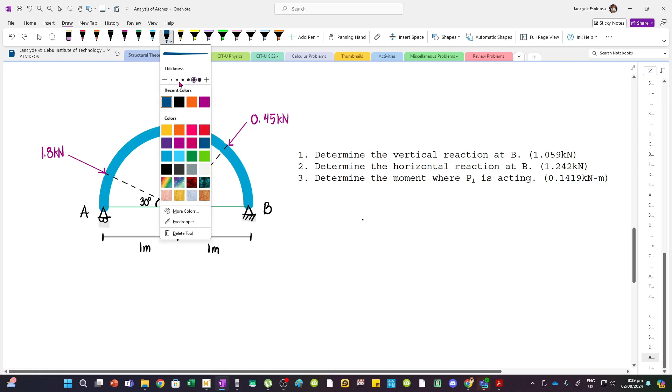Bale, diba meron tong horizontal component, meron din yung vertical component. Sabihin natin this is the x component, this is the y component. So this is 1.8 sine 30 degrees kasi this is with respect to the horizontal. While this is 1.8 cos 30.

For this load naman, we have two components. Meron yan siyang 0.45 cos 45, and we also have a downward component which is 0.45 sine 45. Now this is downward and acting to the left kasi this is down and to the left, parang southwest. And this is down and to the right kasi this is toward the right, but the force is going downward. So that's how you can resolve the components.

So by analyzing this, we can first get the reaction at A by taking moments about B. We have a vertical reaction here, which is sabihin natin AY, and here we have BY saka BX. Taking moments about B, we have AY multiplied by this distance, 2 meters yan.

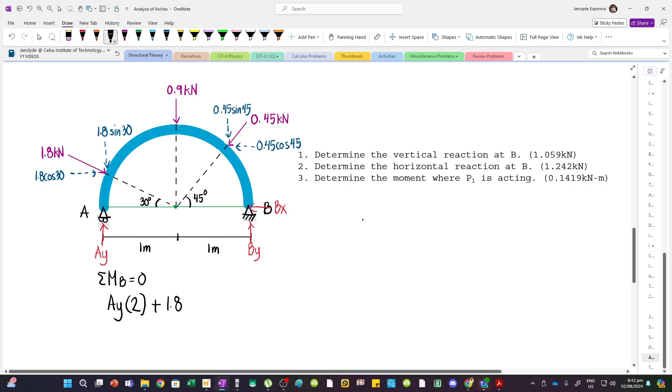So this is 2, and then we have 1.8 cos 30. It will cause a clockwise rotation about B, so plus. Again, we are still using the long method, later I will discuss the short method. So cos 30, and then multiplied by a moment arm of this distance. Ano yan? This is, di ba, meron yan siyang distance.

So this is, di ba, this is the radius. Di ko pala nabigay yung radius, by the way, ito pala. If 1 meter yan from the center, yan pala yung radius, 1 meter pala. So this is 1 meter, 1 meter din yan, kasi this is also the radius, diba? And this is also 1 meter din yan.

So sulat natin, now the moment arm of this force, yung 1.8 cos 30, is 1 meter and then sine of 30 degrees. So bale, 1 sine 30, again we are looking at this triangle. Yan yung moment arm ng force na to.

And then, how about for this force? For this force, this will cause a counterclockwise rotation about B. So we're gonna use minus 1.8 sine 30, and then its moment arm going to B is this distance, which is 1 meter, plus yung distance na yan, which is 1 cosine 30. Tapos na tayo dito.

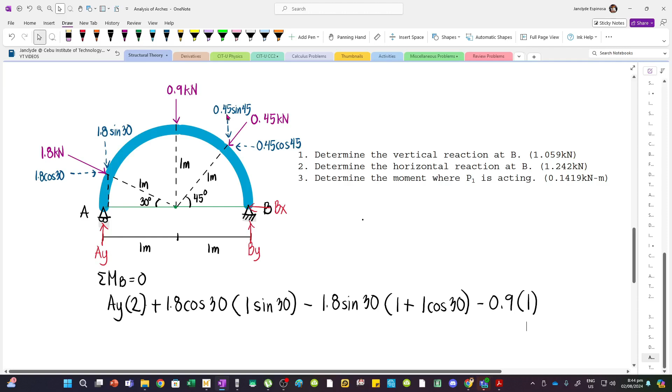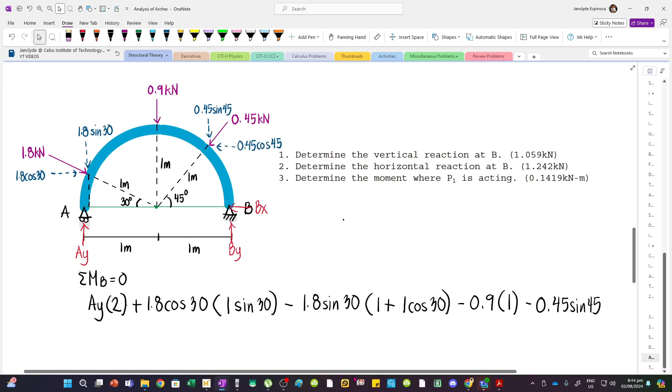And then finally, for this load naman, itong 0.45 sine 45, yan yung vertical component. It will cause a counterclockwise rotation about B. So its moment arm going to B is, di ba, we can extend this line. Yung moment arm niya is the remaining distance, bale 1 meter, and then minus natin yung distance na to.

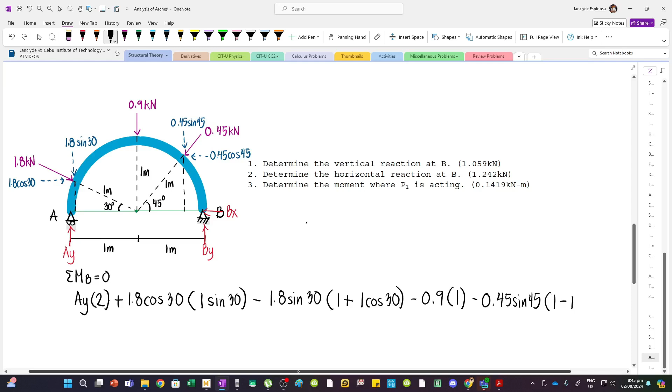So mangyayari is 0.45 sine 45 times 1 minus, bakit 1? 1 kasi yan. And then subtract natin to, which is 1 cos 45. And then for the last load, ito, it will cause a counterclockwise rotation about B.

So minus din yan. Minus, still 0.45, but this is now cosine 45. And then multiplied by this distance, which is 1 sine 45. So medyo mahaba tong method na to, no?

So set natin yan to 0, solve natin si AY. So we have 2 times AY, plus 1.8 cos 30 times sine 30, and then minus 1.8 sine 30 times 1 plus cos 30.

And then we have minus 0.9 times 1 for this load. And then minus 0.45 sine 45 times 1 minus cos 45. And we finally have minus 0.45 cos 45 times sine 45. So medyo mahaba, I mean, set pala natin to 0.

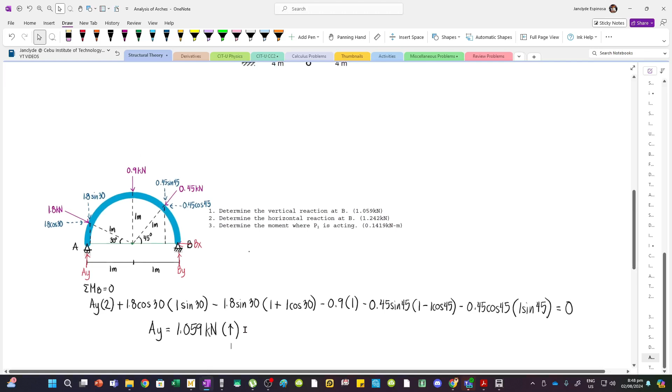But there is another way to solve for AY. We can use the principle of transmissibility. So how can we apply this here? Let's move this. Where? Right here. So how can we get 1.059 by using the principle of transmissibility?

Here's what happens: this load, the 1.8 kN load, acts toward the center of the arc. This 0.9 kN also acts toward the center, and the 0.45 kN is also acting toward the center. So we can apply the principle of transmissibility by transferring these loads to the center.

So here's what happens. We can transmit this load here. So this is 1.8 kN. We can also transmit this one, so this is downward 0.9 kN. And we can also transmit the 0.45 kN load, so it's placed here.

So this is 0.45 kN. If you transfer the loads, disregard the original loads. This is what we will now consider.

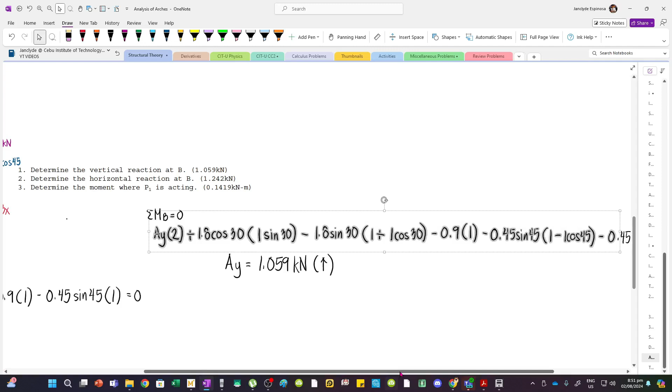So let's set this equal to 0. If you compare, this solution is significantly shorter than the previous one. Let's verify if the value is the same.

Let's retype: we have 2 AY minus 1.8 sine 30 times 1, minus 0.9 times this force, minus 0.45 times sine 45. Let's set this to 0 and solve for AY. Solving for AY, as you can see, the same value comes out. We have AY equals 1.059.

So this is significantly shorter than the previous solution. So just use this technique: transmit the loads if you have loads acting toward the center of the arc. So this is kN, still acting upward.

But this is not yet what we're looking for. It just happened that the vertical reaction at B is equal to this value. Now, to get the vertical reaction at B, we have to sum up forces along Y.

So we have AY minus 1.8 sine 30, minus 0.9, minus 0.45 sine 45, plus BY, that should equal 0. Solving for BY, let's move these terms to the right side.

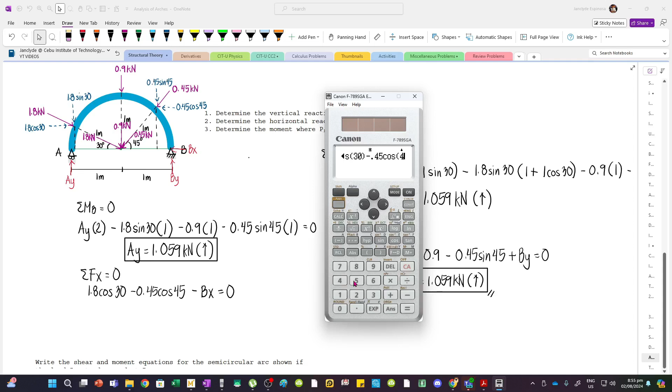So we have 1.24. So BX is 1.241 kN, and since the result is positive, this is acting to the left.

And then for the last question, determine the moment where P1 is acting. By the way, I didn't write it, but for this problem, this is P1. Sorry, I forgot to put it. So let's take moments about P1. Taking moments about P1, this force will be excluded because we're taking moments at that point.

So what will only cause a moment there is the force AY. So wasn't AY equal to 1.059? So the moment at P1 is 1.059 multiplied by this moment arm.

That distance, which is the whole radius of 1 meter, minus 1 cosine 30. Subtract that from 1. So what happens is we multiply this by 1 minus 1 cos 30. Is that right? Let's check.

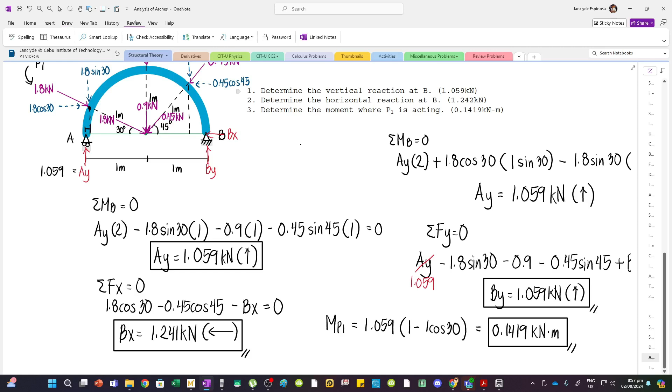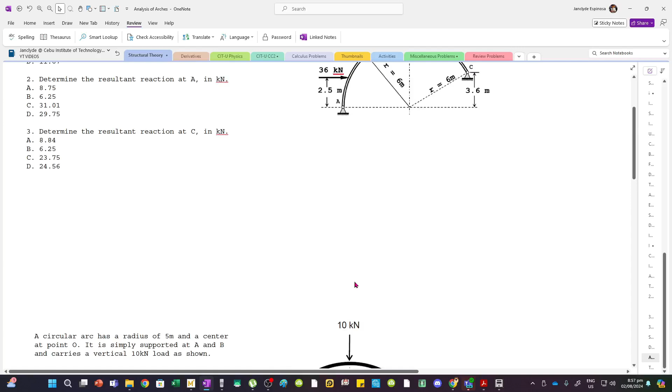So, ito na yung mga sagot. Now, for the next problem, saan ba dito? Check ko alin yung mas madali. Let's just solve this last kasi this is a 3-hinged arch. Bale, magka-cut pa tayo dito. Medyo mahirap. So wait lang, ito muna.

We have a circular arc daw na merong radius na 5 meters and a center at point O. And then it carries a vertical load of 10 kN as shown. So first, we have to find the moment daw at a point indicated as C in the figure. So we need to take the moments here. Moment at C.

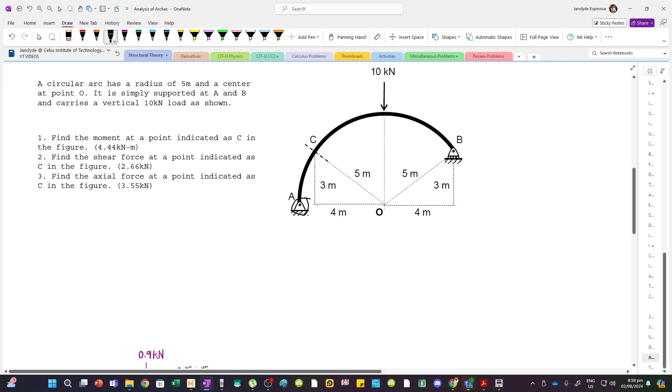Dito, we have to first solve the reaction, the reaction at A and the reaction at B. But since we are only interested in the moment at a point, it's okay to just solve the reaction at the hinge. So to find that, we have to take moments about B. Meron tayong AY.

We have AY. We also have BY saka AX. But since wala tayong horizontal forces na external acting on the arc, ibig sabihin AX is 0 pala.

So we can solve AY directly. Now we have AY multiplied by what distance? Don't use 4 plus 4. Diyan nagkakamali yung mga students, kasi yung 4 meters kasi, yan kasi yung distance patungo sa C lang. Diba? So this whole distance pala is equal to the radius. Diba? So this is actually 5 meters.

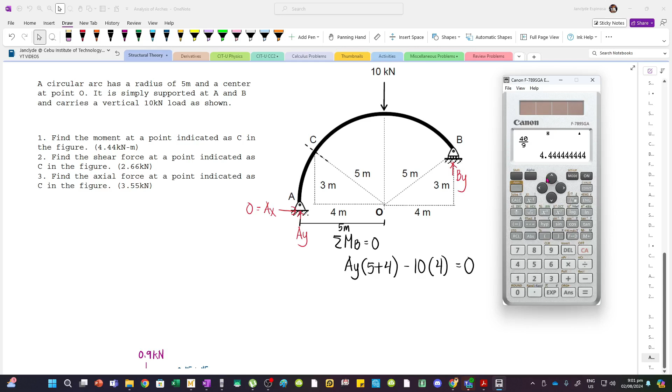So AY pala must be multiplied by 5 meters plus 4 meters going to B. And then we have minus 10, this force, multiplied by 4 meters going to B. So set natin to 0. Yung AY pala is 40 divided by 5 plus 4, tama ba? So we have 4.44. So AY equals 4.44 kN.

Pero hindi yan yung hinahanap natin kasi walang reaction dito sa tanong. So move na lang natin. And then this is 4.44 kN. Now slice down natin to.

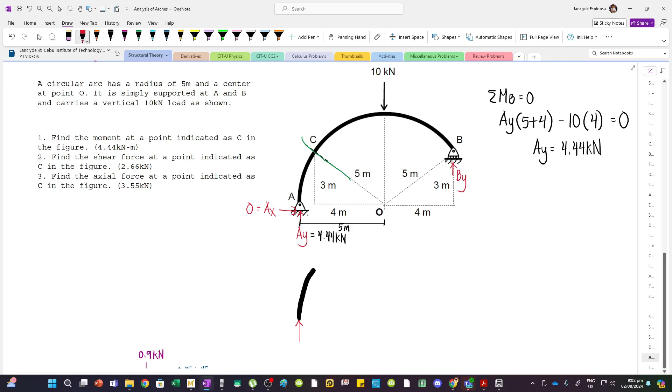Let's cut this section. Slice natin yan. So we have this figure. Trace ko na lang yan. We have this figure. And then we have a reaction here at A, this is 4.44 kN.

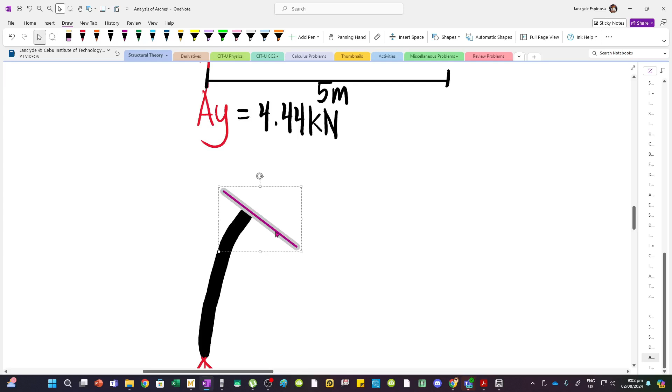And then here, since this is cut na, notice na what's parallel to this line is parang ganto. Ito yung line parallel to the cross section. Now diba, shear corresponds to forces, shear force corresponds to forces parallel to the cross section.

So ibig sabihin, yung force parallel to this line is yan yung shear. And then we also have to draw another axis perpendicular to this, kasi hinahanap din kasi yung tawag dito, hinahanap yung axial force. Diba, axial force corresponds to forces perpendicular to the cross section. So let's also try to draw a perpendicular line.

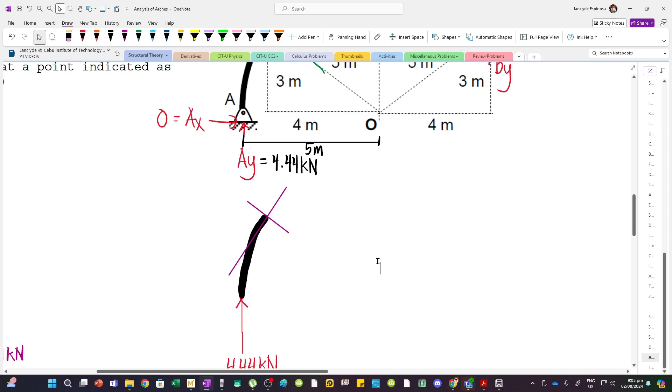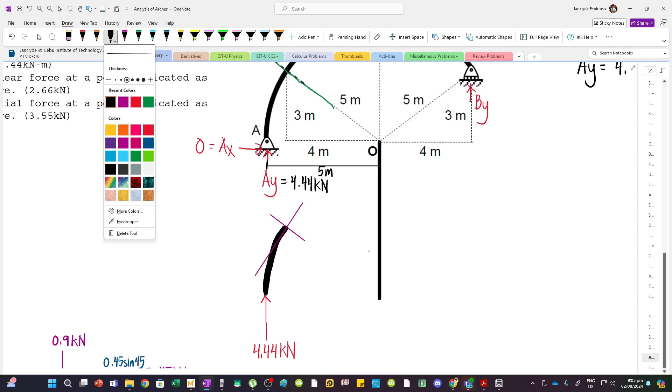Extend lang natin yan para makita nyo yung cross. And then transmit natin to. By the way, change ko yung thickness. This is the center point. And then we can draw a line here. So this is point O.

And then yung distances natin, this is 4, 3 yan, and this is 5. So to solve this problem systematically, solve muna natin yung angle theta, which is this one. So to solve angle theta, we can use sine, cosine, or tangent, but tangent kasi yung sanay ako, so gamitan na lang natin ang tangent theta equals opposite over adjacent. So opposite side is 3, and then the adjacent side is 4. Yan, so 3 over 4. So kunin mo lang yung arctangent ng 3 over 4. This is 36.87.

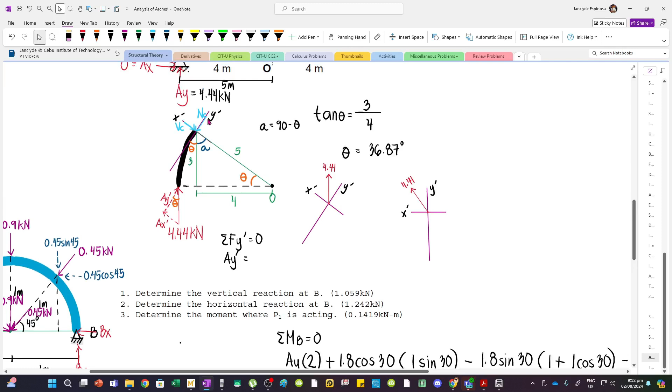So, to solve NC, we have to sum up forces along y prime. Sum Fy prime equals 0. So we have Ay prime equal to, and since we assumed the directions are opposite, we just use equal signs.

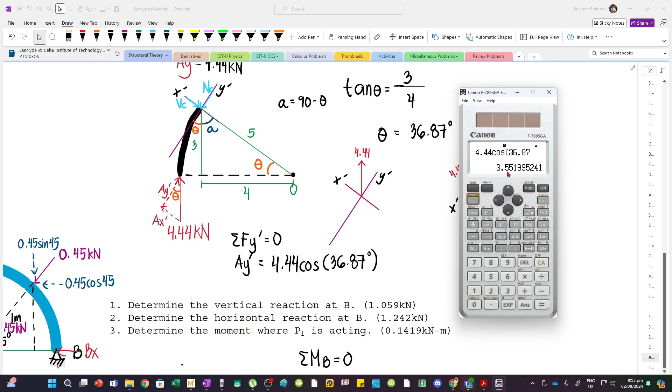Now, what is Ay prime? Ay prime is 4.44 cosine of theta, because if you look at this triangle, this is the adjacent side and this is the hypotenuse, so we use cosine. So 4.44 cosine theta, and theta was 36.87. So 4.44 cos 36.87, this gives us 3.55.

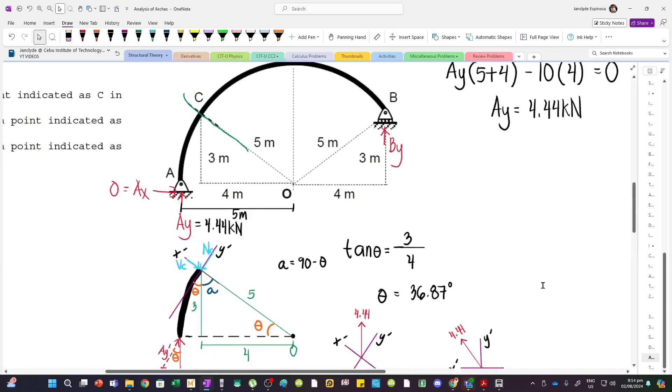This is NC actually—sorry, this was Ay prime. Let's equate the whole system. So, 3.55 kN, that is the normal force. Let's check it. Correct, the axial force is 3.55.

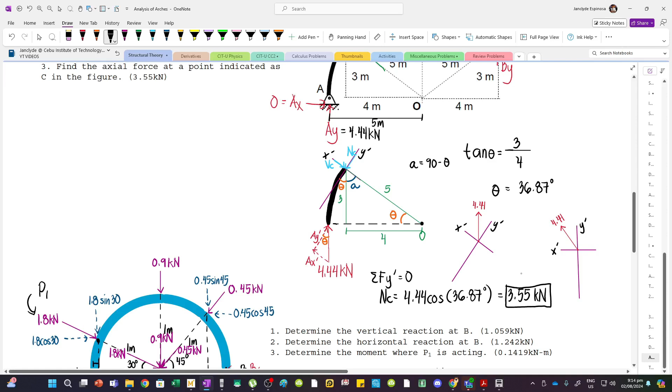And then for the second question, what is the shear force at C? The shear force is parallel to x prime, so to solve it, we have to sum up forces along x prime. We have VC, and since the directions are opposite, it equals Ax prime.

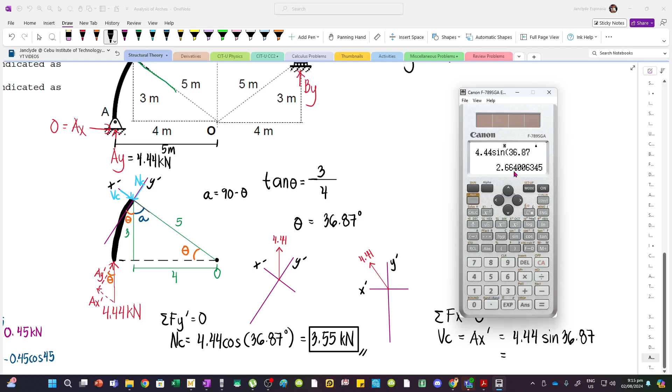Now, Ax prime is 4.44 sine theta, because this is the opposite side to our reference angle. So 4.44 sine 36.87, this gives us 2.66 kN. Let's check it—correct, 2.66.

Medyo madali lang, kung alam mo lang paano i-rotate yung components.

Now, for the first question, ano daw yung moment at a point indicated as C? Meron din tayong reactive moment dito. Sabihin natin MC. The same lang kanina, MC is the vertical force, which is 4.44, multiplied by a distance of again, perpendicular distance, we have this one. Diba, this is, if this is 4, the radius is 5. Ibig sabihin, what's left is, yung distance na yan, this is 1 meter pala. Medyo madali lang kasi times 1. So essentially, 4.44 kNm yung moment at C.

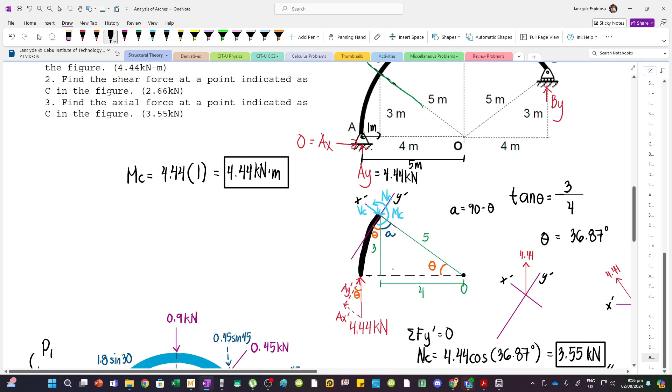So ito naman, we have a 3-hinge arc, and then hinge supported siya at A and C, and merong internal hinge at point B. So let's first check the determinacy of the beam. Diba, we can use R equals 3N.

Now, if you'll use this formula, R must include all the reactions, including internal reactions. Now, we have 2 reactions dito sa hinge, another 2 here, so 2 plus 2 magiging 4. And we have 2 reactions din sa internal hinge, so 2 plus 2 plus 2 magiging 6. And then, how many members do we have? Diba, we have 1 member plus 1, kasi separated sila by the internal hinge. So 3 times 2, diba, magiging equal. 6 equals 6. So since equal yan, determinate pala yung structure natin.

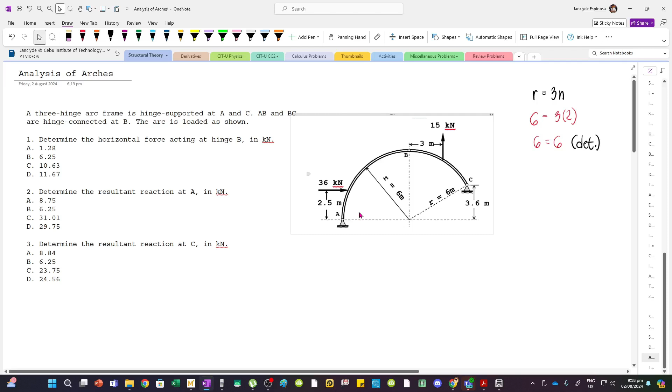So we don't have to apply any deflection methods, mga ganun, superposition, to solve the reactions. Kasi this is determinate. So paano to siya solve? Try nyo muna. Wag na lang kasi medyo mahaba pala to. And solve na lang natin directly.

So for the first question, determine daw the horizontal force acting at the hinge. Now, for this type of problem, yung gusto ko is I will use two equations, two unknowns, and yung first kong hahanapin is the forces sa internal hinge. Try daw natin.

Let's cut the figure at this point, slice natin siya to reveal the internal forces. Trace ko na lang yan, trace natin, saka ito rin. Move natin to, and also this one. So we have here the reaction sa hinge.

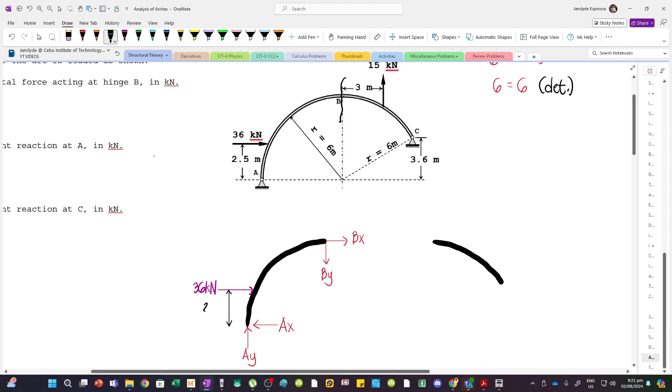So BX yan, and then we have an applied force dito, meron tayong 36 kN, applied 2.5 meters from A. And then this distance naman, from A to the internal hinge, yan ay magiging 6, kasi the radius is 6. So this distance is also 6 from the center up to a point on the arc. So dito na lang, this is 6.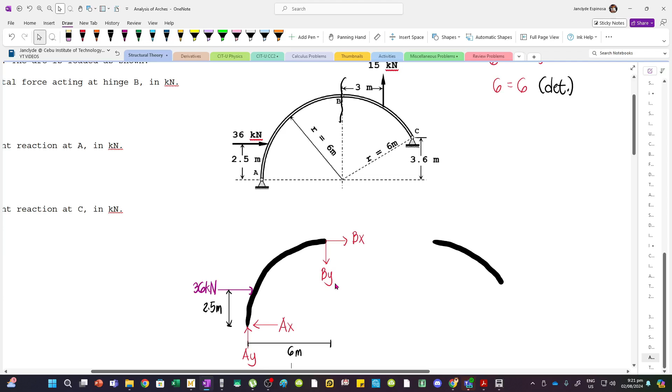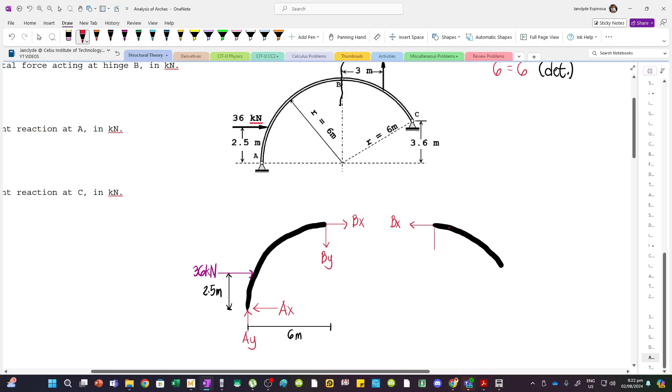And then for the other side naman, for the right side of the cut, diba, for the internal forces, dapat opposite yung directions mo to maintain equilibrium internally. So if this is going to the right, for the right side of the cut, this must be going to the left. So this is BX. Again, kung mali yung direction dyan, di mo na masusolve yung problem, kasi mag-iiba na yung reactions mo. So always check the directions if you have an internal hinge. Now BY here is acting downward, so dito pala sa right side ng cut ko, it must be acting upward. So this is BY.

And then at C naman, this point, meron tayong CY, we also have CX, and we have an applied load right here. This is 15 kN, and yung distance niya going to the internal hinge is 3 meters.

So solve doon natin yung BX saka BY. Now we can do that by summing up moments about A and about C para ma-eliminate natin yung forces sa external reactions.

So we have here summing up moments about A for the left side of the cut, we can eliminate the 2, so we only have 36 times 2.5. This will cause a clockwise rotation about A. And then we have BY, it will cause a clockwise rotation then, so plus BY, multiply ko yan by 6, perpendicular distance.

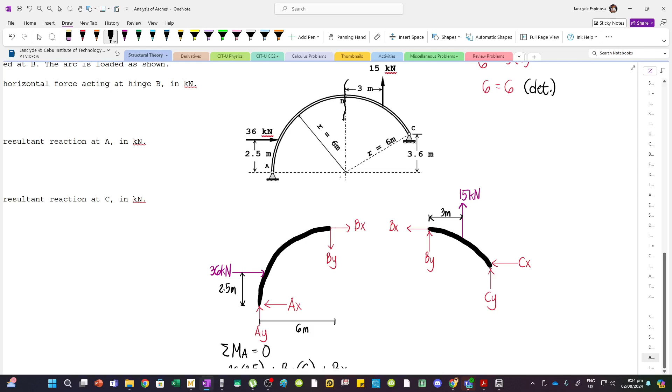And then we also have BX, it will still cause a clockwise rotation, so plus BX, the moment arm is still 6, 6 meters din yan. So lagay ko na lang, no? This is 6 meters.

Equal 0. So this is my first equation. Meron tayong 2 unknowns, so we need 2 equations. So the second equation will be dito sa right side ng cut. Summation of moments tayo dito naman sa C.

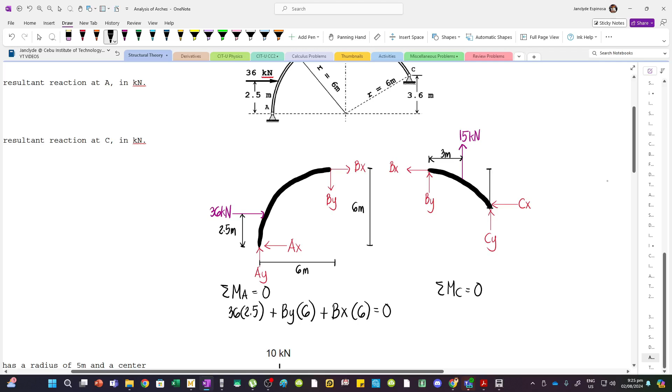So we have minus BX multiplied by this moment arm, yung distance na yan. So ano yan? Diba, the whole distance is 6. If we'll extend a line dito, yung buong distance is 6. So yung natira pala dito

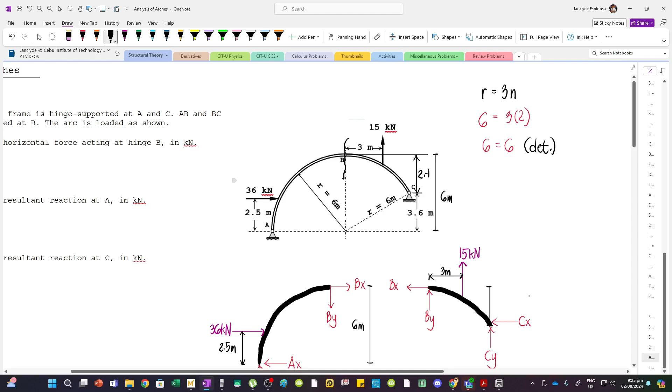is 6 minus 3.6. So ano yan? Diba? 2.4. Tama ba? Double check na lang natin. Tama, 2.4. So we have minus 15, yung force na yan. I mean, positive pala.

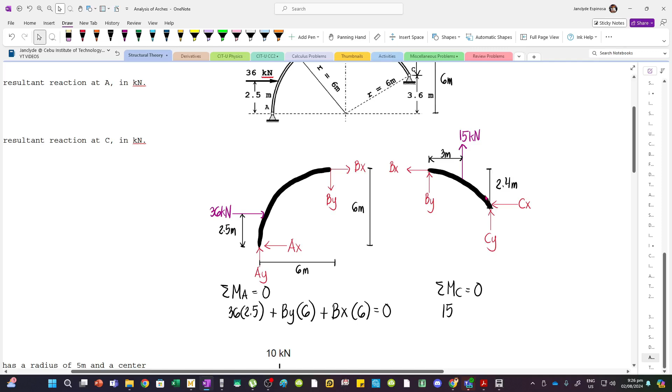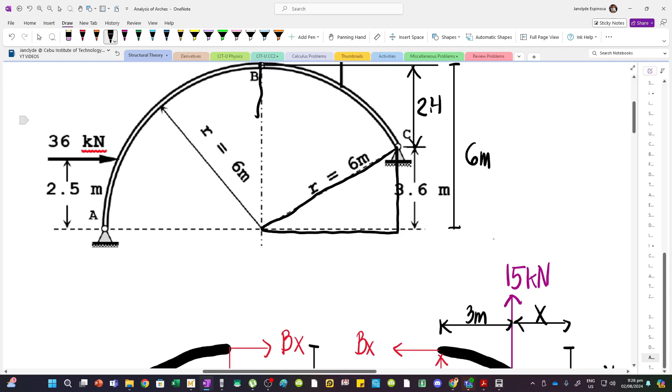15, and then multiplied by this remaining distance, yan, hindi din natin alam yan. Distance, let's say x. So ano yung x? Diba, we can draw a triangle dito. We can consider this triangle. So if this is 3, ano yung remaining distance patungo sa C?

Diba, that will just be 6 cosine of, wala pa pala tayong angle. Sabihin natin theta. 6 cosine theta minus 3 meters. I hope you would agree. Minus 3, yang distance na yan.

So ano yung theta? Meron tayong opposite side to the reference angle, opposite, and we also have the hypotenuse. So ano yung function that relates the opposite and the hypotenuse? Diba, we have to use sine kasi opposite over hypotenuse. So sine theta pala equals 3.6 divided by 6.

So solve natin yung theta. Arc sine of 3.6 over 6. We have 36.87. And then, to make our results more accurate, store na lang natin. Shift, store, A. Lagay natin sa A.

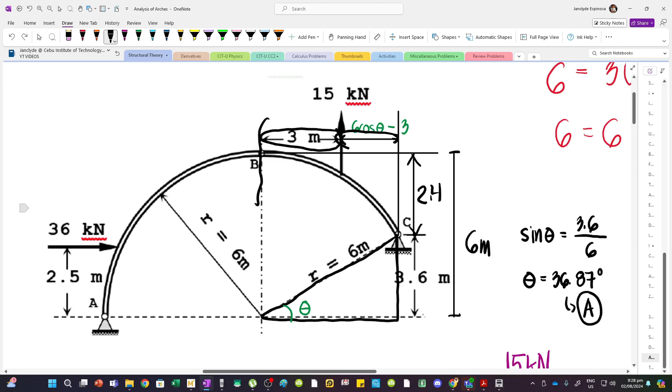So ito yung distance natin. Again, 6 cos theta is this distance. Yan, yung buong distance na yan. And then minus natin yung 3. Makukuha natin yung remaining distance. I hope agree lang.

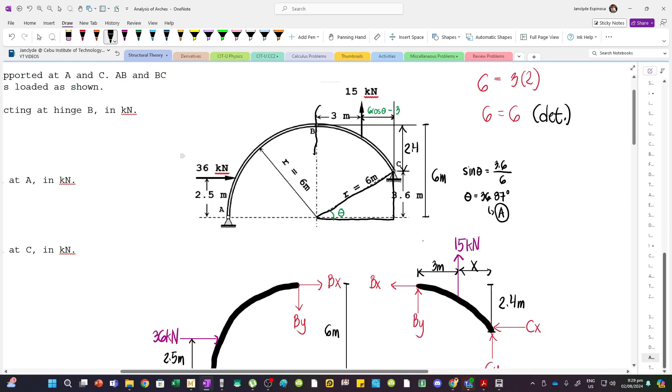So 15 pala, multiplied by 6 cos theta minus 3. Again, yung theta nakastore sa letter A. And then we have BY, yung distance na yan, yung force na yan, it will cause a clockwise rotation about C. So plus BY, multiply natin by 6 cosine theta. Kasi yung moment arm nito, ng BY, is itong buong distance. So this is 6 cos theta.

Theta pala. And then we also have BX, it will cause a counterclockwise rotation about C. So minus BX multiplied by 2.4. So set natin to 0.

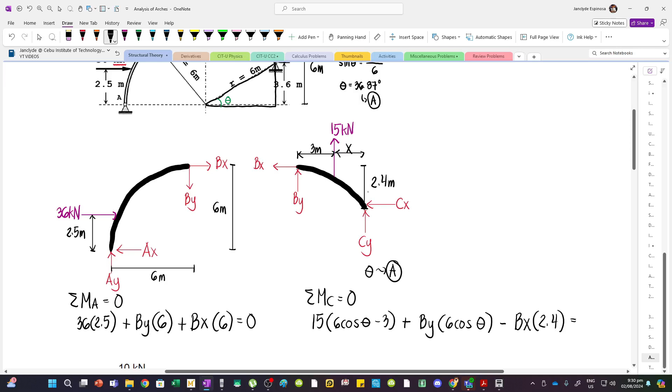So we can rearrange the equations para ma-solve siya gamit yung 2 equations, 2 unknowns. So ano na lang, BX yung unahin natin, BX times 6 plus BY times 6, and then we have to move this to the right side of the equation. So equals minus 36 times 2.5. So ito yung first equation natin.

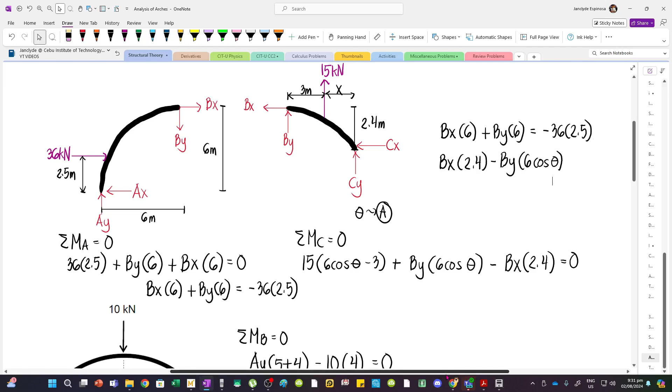Sulat natin dito. And then for my second equation, I have BX yung unahin din natin. Move natin yan to the right side, magiging positive yan. So BX times 2.4. And then, moving this to the other side, magiging minus. Minus BY, and then 6 cos theta. And then equals 15 times 6 cos theta minus 3.

So let's just use our calculators. Press mode, go to equation, and then two unknowns. So 6, and then minus 36 times 2.5. And then next is 2.4, and then minus 6 cos theta. Again, yung theta nakastore sa A, so recall A. And then 15 times 6 cos theta minus 3. Nakastore yan sa A, and then minus 3.

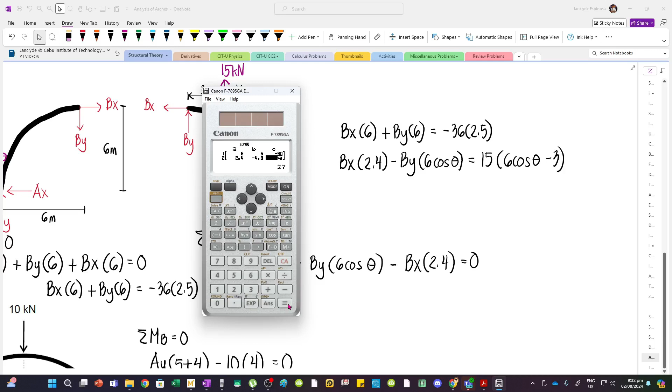So we have minus 6.25, that's BX. And then we have minus 8.75, this is BY. So ibig sabihin pala, itong dalawa, these are negative. So mali pala yung assumption natin ng directions. So sulat natin, wrong assumption of directions.

But diba, sa totoong paper, you don't have the luxury of just erasing this. Dito, madali lang, pwede mo lang i-erase yung arrowheads and then palitan mo. Wala kang luxury niyan. So if you have a negative sign pala, just still consider your original assumptions, but just take into account the negative signs once you will solve for a certain force. Yan na lang yung gagawin natin.

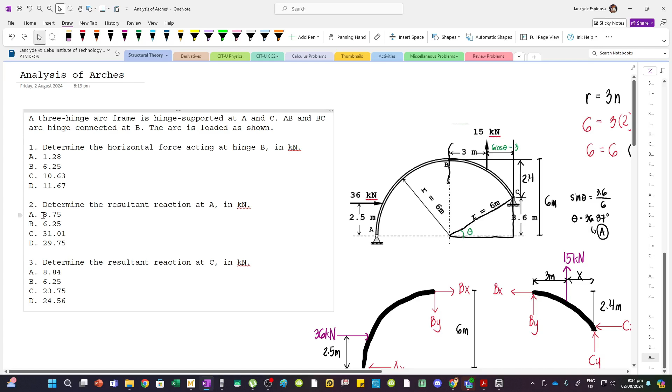Now, don't be excited kasi diba nakuha natin minus 6.25 saka 8.75. Baka yung sagot nyo ito na, letter B saka letter A. Kasi yang trap na questions, hindi kasi yan yung hinahanap. Kasi sa first question, we have to find the horizontal force acting at B. So tama lang to sa number 1, but sa number 2, hindi 8.75 yung sagot.

Just a heads up. So BX is 6.25, therefore letter A pala yung sagot. I mean letter B.

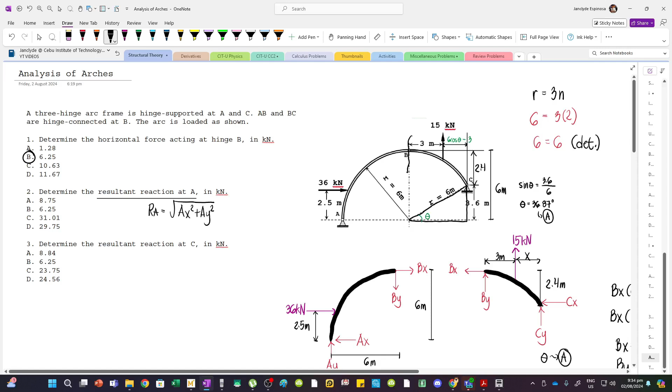Now, number 2 is the resultant reaction at A. Now, this is RA, which is resultant kasi yan. So bala, AX squared plus AY squared. So we have to get AY and AX pala. But since alam na natin yung AX saka AY, ito na lang yung BY pala saka BX, masusolve na natin yung forces dito.

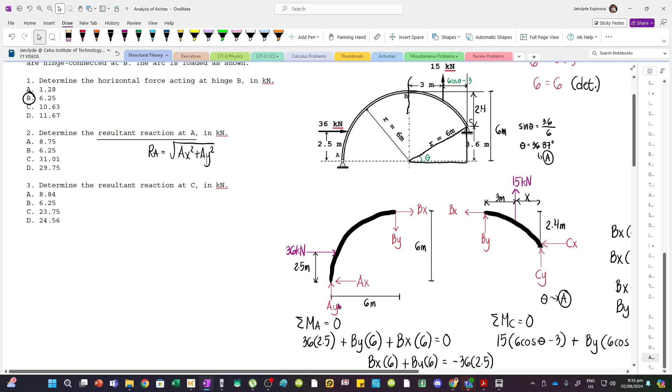So still considering the left side of the equation, alam na natin to. This is minus 6.25, while this is, move ko lang to. BY is negative 8.75.

You can just retain the original figure but take into account the signs. So, to get AY, we can sum up forces along Y. Now, the vertical force acting here is only BY. So, AY must be equal to BY. But since we assumed downward, it becomes minus. Minus BY equals 0. So we have AY minus negative 8.75, taking into account the sign, equal to 0.

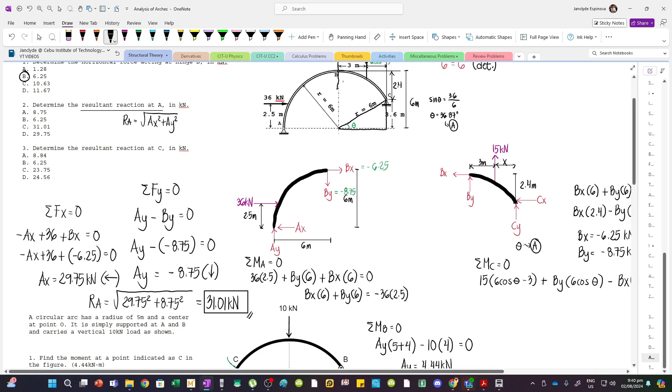So RA is the square root of 29.75 squared plus 8.75 squared. Why didn't you use minus? Because when you square it, it becomes positive anyway, so you can just get the absolute value. Square root of 29.75 squared plus 8.75 squared gives us 31.01. So is this our answer? Yes.

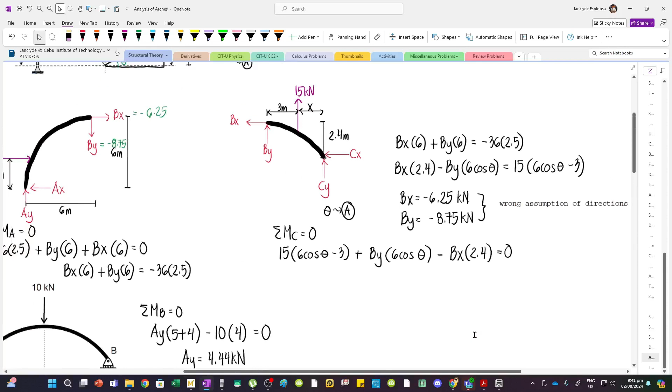For the last question, the resultant reaction at C, we need RC, which is CX squared plus CY squared. Now we're on the right side of the cut. Summing up forces along X, we can get CX.

So this is minus 6.25 and this is minus 8.75. We have BX going to the left as assumed. So minus, but its value is negative, so minus negative 6.25, and then minus CX, equal to 0. So CX becomes positive if moved to the right. So CX is positive 6.25. This is going to the left since it's positive - our assumption was correct.

Now let's sum up forces along Y to get CY. We have BY - just the value, we assumed it as upward but the sign is negative, so minus 8.75, plus 15, plus CY. This equals 0, so CY becomes - moving it to the right, minus 15 plus 8.75, giving minus 6.25 for CY.

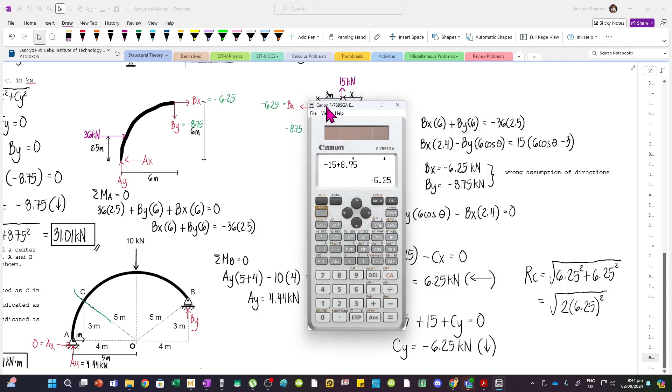So our assumption was wrong - this is actually going downward. It's also in the choices, there's a 6.25 but that's not the answer. The answer must be RC equals square root of CX squared plus CY squared, which is 6.25 squared plus 6.25 squared. Or you can just write square root of 2 times 6.25 squared, since both forces are the same. So 2 times 6.25 squared gives us 8.84. What letter is that? This is letter A.

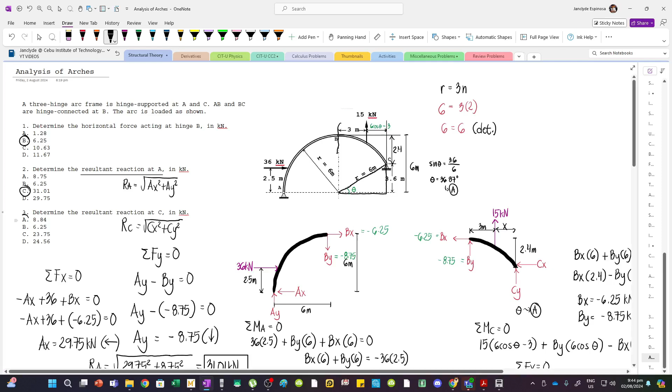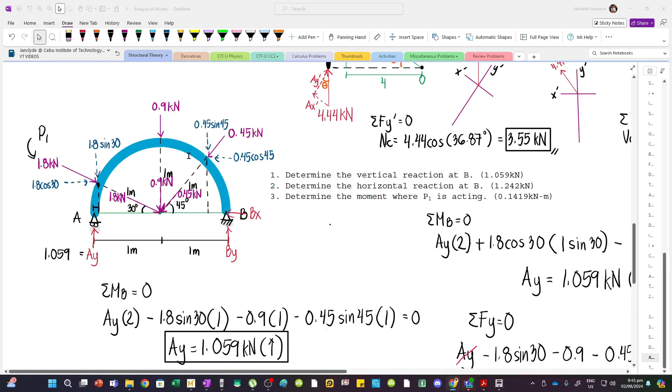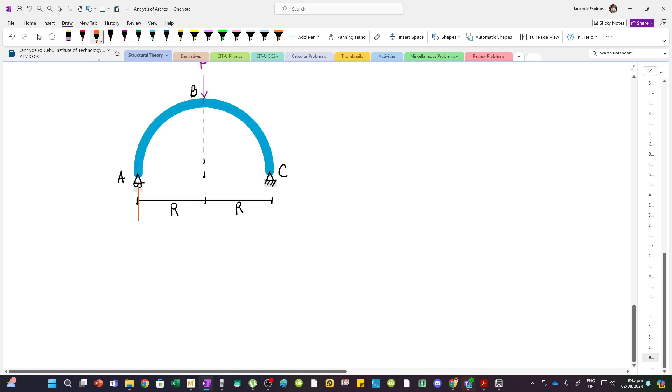Now for this one: write the shear and moment equations for the semicircular arc. This is easy because the process is the same. Now if you have a vertical force here in the middle, then we have a reaction here equivalent to half of the force. So this is P over 2, and this is also P over 2. Now we have two conditions because our angle can be lesser than 90 or greater than 90, since this consists of 180 degrees.

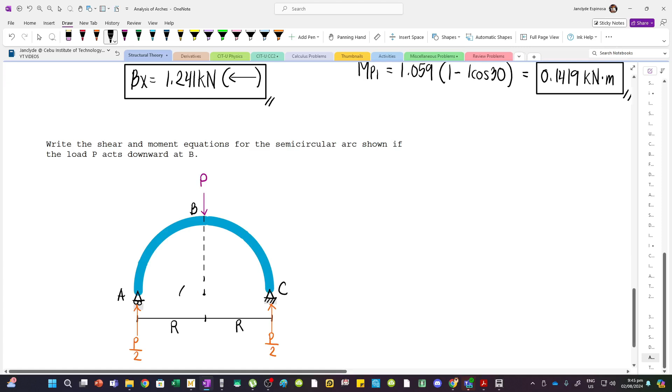Now theta can be like this - this could be our theta. Or it could also be like this - this could be our theta. So we have to make two equations for the two cases. Let's first make an equation for the case where theta is lesser than 90.

This is easy because, remember the problem earlier? Essentially, since we only have a vertical force, the nature of the problem is similar. So what if I just copy that and change the signs? Instead of 4.44, this is now P over 2. And it's not NC that we're looking for, so let me remove that - this is now P over 2.

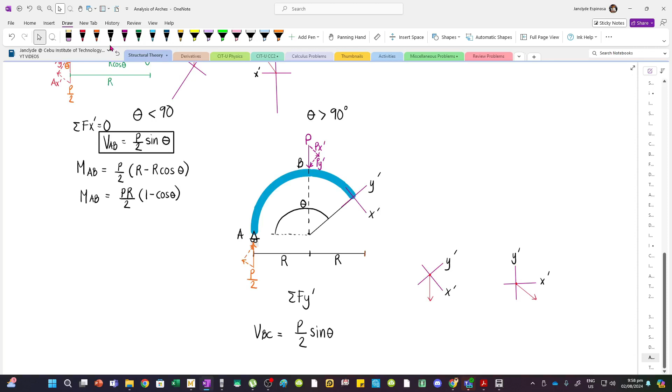But we're only interested in the shear force, so this is Px prime that we'll get. Now, theta is with respect to the vertical going to the component along y prime. So this is theta, this too. So theta is P sine theta, still the same.

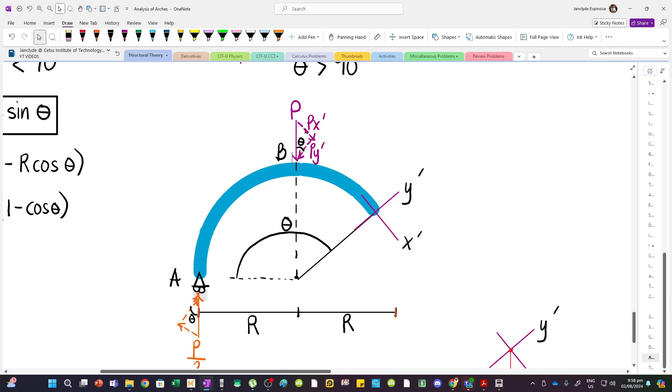But their directions are opposite. This one is going to the left, this one is going to the right. So we have to use a minus sign to indicate the difference in sign here, because my assumption is like this. Let's assume the force here is going here. So this is what I'll use. Wait, let's make this one go here instead. So, P, again, P sin theta, that's the component.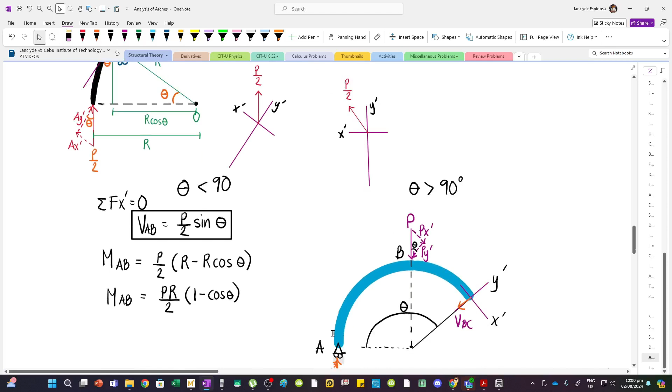And then minus, let's say shear BC. Shear BC, that's it. And then let's replace this too. VAB, NAB, and MAB. And then here too, VBC, NBC, and MBC. So P over 2 sin theta minus P sin theta, essentially we set this equal to 0, so minus VBC equals 0. And then I just moved VBC to the other side of the equation, so it becomes positive.

Equals VBC. Now we can factor out P, so it can become P times, what is P over 2 minus P? The variable coefficient is the same, so 1/2 minus 1 is negative 1/2. So negative 1/2 P sin theta, that's VBC.

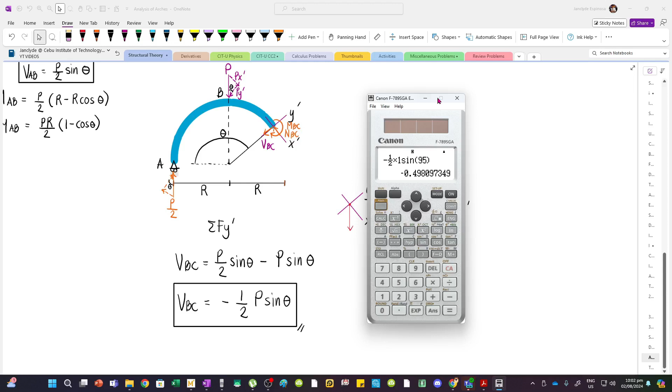Let's check. Minus 1/2, let's say 1, and then sin theta, let's say 95. Negative. So that's a wrong assumption. The assumption from the book is negative 1/2 P sin theta. This is the direction; if it's a wrong assumption, it should be like this.

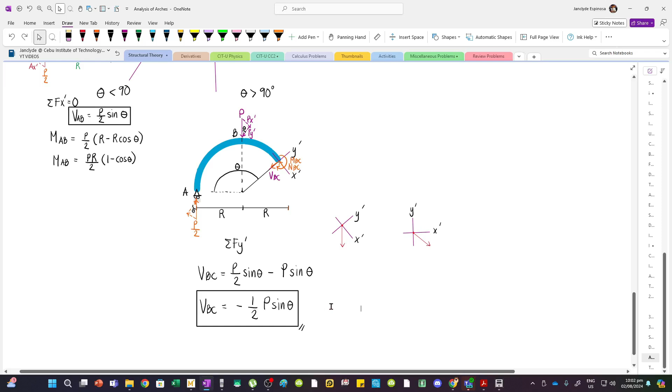So what about the moment? For the moment, we have to take moments about this point. So MBC is, we have this force P over 2, we have to multiply this by the moment arm going to this point. Now we can project a line here. So what is this distance? This one: this is R plus, considering this triangle, it becomes R times cosine of 180 minus theta, because if this is theta, then the remaining angle is 180 minus theta.

And then we have R plus R cos(180 minus theta). And then we have minus P, that force, multiplied by only R cos(180 minus theta), that's the moment arm. So we can factor out PR, because expanding this becomes PR over 2 plus PR cos(180 minus theta) over 2, and then minus PR cos(180 minus theta).

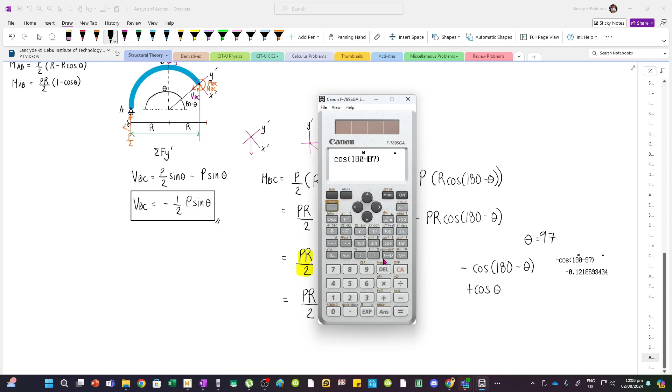To verify this, let's consider any angle greater than 90, let's say 97. So negative cosine of (180 minus 97), we get this value. Let's screenshot this: minus 0.121. Now let's try positive cos theta, theta is 97, so let's compute for 97. It will still give the same value, so both are the same.

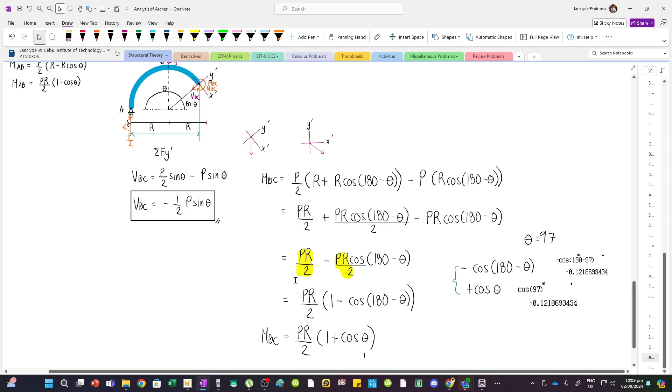So we can change this expression to shorten it. Let's make it positive cos theta. So MBC is PR over 2 times (1 plus cosine of theta). This is the answer in the book. Now if I were the instructor, I would accept this solution too, that's fine. But so you won't be confused, since the book is a bit different, I showed what we can also apply. So both are the same.